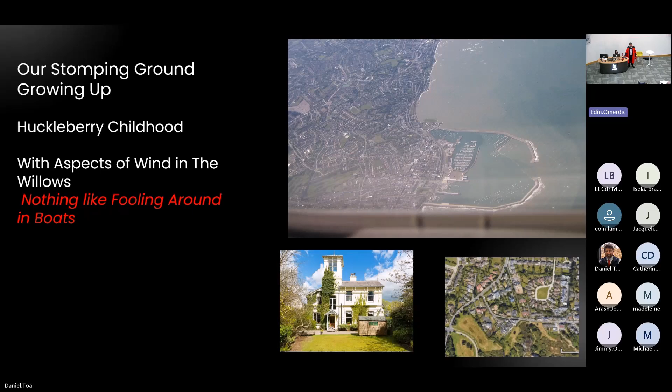Yep. I'd say this one is maybe my school. So primary school was in Oliver Plunkett in Monkstown Farm. I think that's changed over time. There were 53 in my class, and we had 2 classes in the boys. The other was 50 as well, and there were also 2 classes in the girls. So it gives you an idea of the size of schools and the size of the population. Obviously, I'm one of the baby boomers.

And then secondary, we went up the hill on the 46A bus to Stillorgan, which was an engineering and science focused school with laboratory equipment. I think that's enough on the schools. Next up. Okay.

So early spark ventures. When did I start getting interested in things electrical? So as a kid, Mars had a train set, that's the oldest brother. He may be online, but it's very, very early in Sydney.

I remember when the Bakelite plugs and sockets used to break, being the one who was interested in that sort of thing, so fixing those. I do also remember taking apart a battery and being disgusted with the sticky goo that was inside it.

But then one thing, asking Dad the questions kids always ask their parents: which would win, a lion or a tiger, or why did the Tweety birds not fall off the electric wires electrocuted? And so at that age I understood they're isolated, they're not in touch with the ground, they won't get electrocuted.

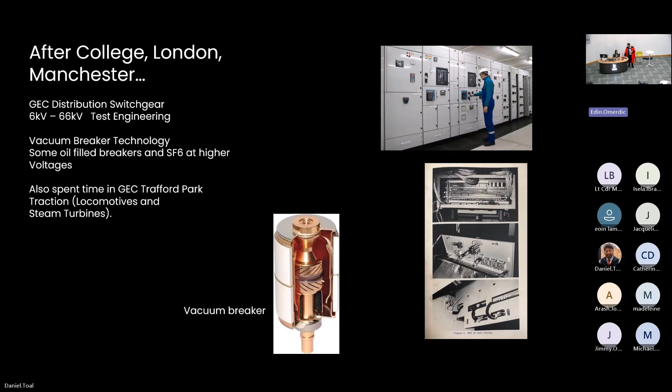So we'll go on to the next slide. Okay. Next up.

One thing I noticed: the rate of change in electrical engineering was slower than I was maybe keen on when I was a young buck, and part of the reason is electrical technology is designed to last. So the installation in the London Underground, the installation of Ardnacrusha in Ireland, these electrical plants are still in existence. They have a 100-year-plus lifespan.

So the influence that has on electrical engineering design is we don't want the service teams and the designers to be designing a new version like Microsoft Windows every year, because the service people have to service equipment for 100 years. So it means the technology is very well engineered, but the rate of change can be slow. And as a young buck, I thought, gee, I want a little bit more excitement than that, although there was the high voltage risk aspect.

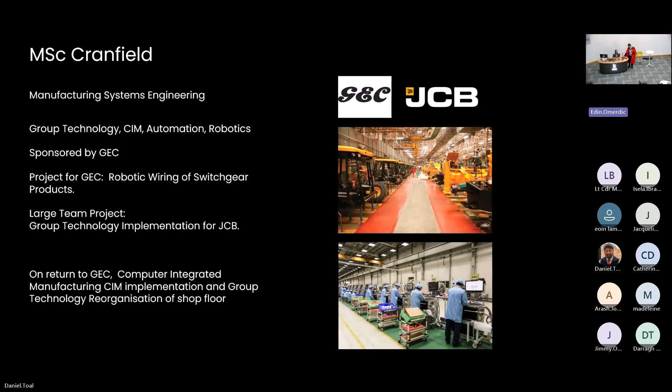Next up, better get to the research fairly soon. Sorry. Here we go.

Oh, yeah, forgot this. While in Manchester, I used to play in a small three-piece band. We called ourselves Choir Crack, which everybody in Ireland knows what that means, but most other people in most other countries wonder what's it. The new band that's into the new drug at the time from America. But no, we all know what it means. So we used to play clubs and the odd wedding and pubs and the like.

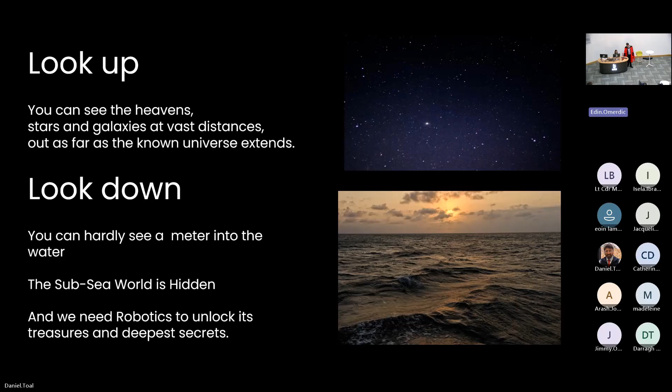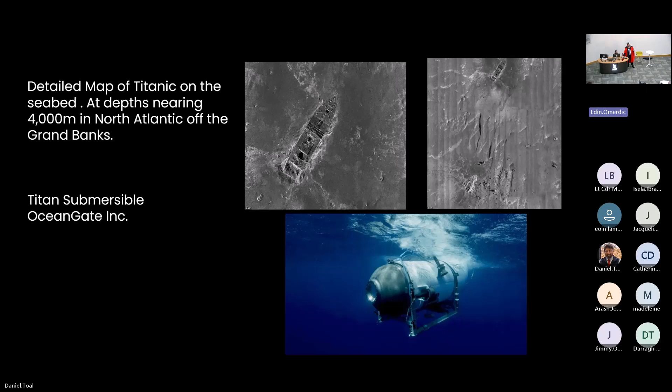Most of our robots, we don't need a big air-filled compartment for humans. We can shrink down small air enclosures for some of the electronics that we can't have in fluid, but a lot of the stuff we can actually have in fluid. So we avoid that in robotics.

So while Challenger Deep, the deepest part of the ocean, which slide am I on? The one with Hidden Ocean.

Challenger Deep, the deepest part of the ocean, is in the Pacific, not the Atlantic, but it's 11,000 meters deep. The abyssal plains are down at 6,000 meters. So while little science submersibles have gone to the bottom of even Challenger Deep, the trouble is they're so heavy with the wall structure. The scientists can get down, look through tiny portholes, see the outside environment, but they're almost immobile. They go vertically up and down.

So there's no robot or submarine that exists that could launch, say at the Shannon or West Clare, follow close to the seabed and come up in the US of A or in Canada. It just doesn't exist. So most of the ocean is actually still inaccessible. Robots can be designed to target certain zones. So we're working in this space. The oceans are unknown to us. Next up.

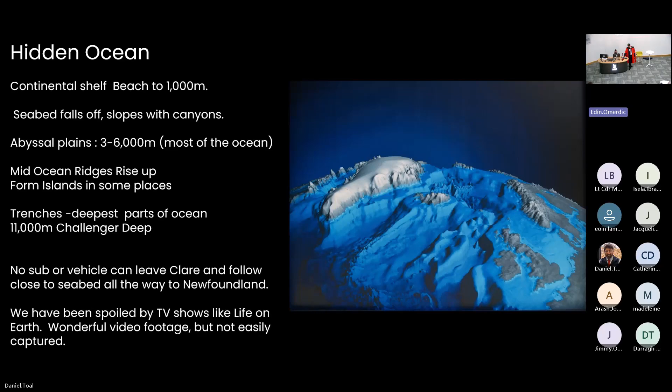So the marine challenges. When we want to start unlocking this underwater world, the space guys have to develop their robot to survive takeoff. But once they're up there, they've only a 1 atmosphere difference between inside the spaceship and outside. We have the same pressure for every 10 meters we go down. So 1 ton per fingernail when you're down at the Titanic. So pressure depth is a challenge. We've no radio communication. We can't navigate with GPS.

So there's so many challenges there. I'm not going to go through the list, but if you're quick readers you might have caught some of them. There's lots for us to do if we want to unlock that underwater world. And that's effectively what we've been focusing on in our research group, dealing with the challenges so we can get the robots operating in these zones. Next up.

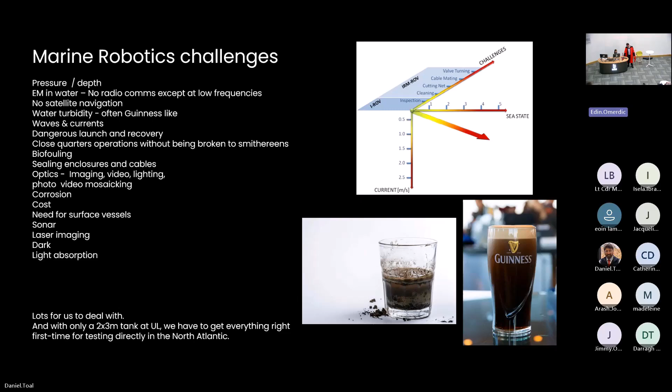Okay. So our team is currently of the order of 20, 25 people. Over time people leave and come, so I'm not going to list all the names because I'll leave somebody out. Some of our alumni are here. So this achievement isn't my achievement. It's all these people that have worked in the group, supervised by me and my colleagues. The co-directors are Gerard Dooly and Edin, who are both here, and Aoife is our coordinator. I won't go naming everybody else, because I'll leave somebody out. Next up.

Ken Harris is here, and Ken and Paddy O'Donnell used to do an awful lot of our mechanical work in the workshop to support building some of these robots. The great interaction we had with them is we could design very actively by walking up and down with them. Because we were designing one-off vehicles, we didn't go to the full extent of doing full detailed engineering drawings.

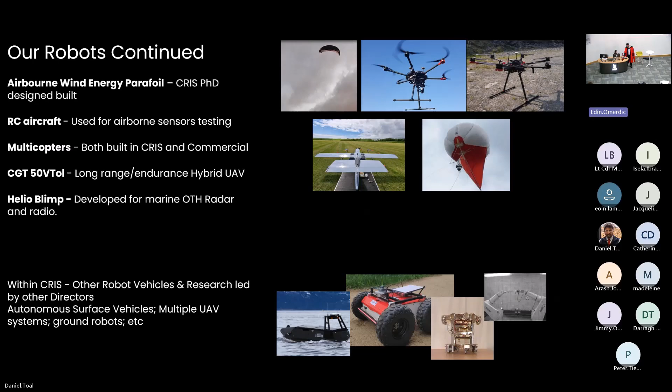So some of them are in the area of electrical engineering, developing electrical engineering technology to make the installations more robust, both electrically, so that to deal with the very harsh environment offshore, but also then the operations in the offshore environment, the humidity, the waves, the moisture, sealing against the weather, and then also integrating into the grid.

Most wind turbines are grid connectable directly, which means you can control it to give you exactly 50 hertz, so it'll match to the grid. What we're saying is, let's do what we have a patent in this. Let's interconnect all the offshore wind farms together. Let them interact together in unison, but let them be frequency wild. Let them not be compliant with grid codes, because we can remove all the power converters from the offshore installation, one of the highest failure rate components, especially in high humidity and salt environments. We bring that power conversion onshore, and we convert to grid compliant 50 hertz voltage regulated power at landfall. So that's, for example, one of the patents.

The other patents are in the sonar technology area. The next bunch is a bunch of PhDs in submarine robotics, developing vehicles, developing the control systems, developing sensors so that it can work very close to targets. If you're operating in an environment where the turbidity is Guinness-like, it means you can't see the target you're about to bump into. If there's a wave or a current pushing you, we have to deal with how do we detect objects close to, when we want to work close to them, we want to maybe intervene on the targets, but we don't want to crash into them all the time.

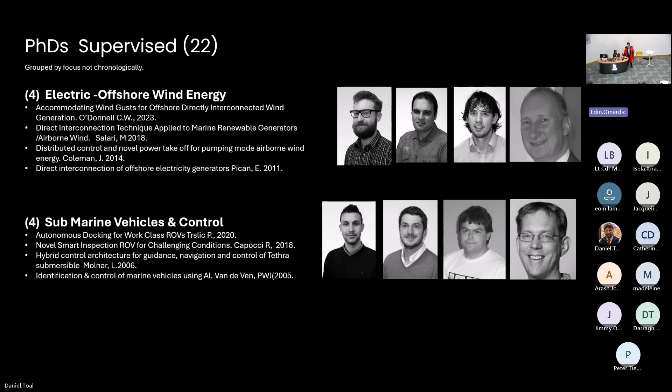So maybe next slide, there's some more PhDs in the next bunch. There's an area of sonar and sensors development. There's a best paper on the sensor. Sean Nolan is in the team here, so we've developed a sensor which got best journal paper over a 2-year period for the Journal of Marine Engineering and Technology.

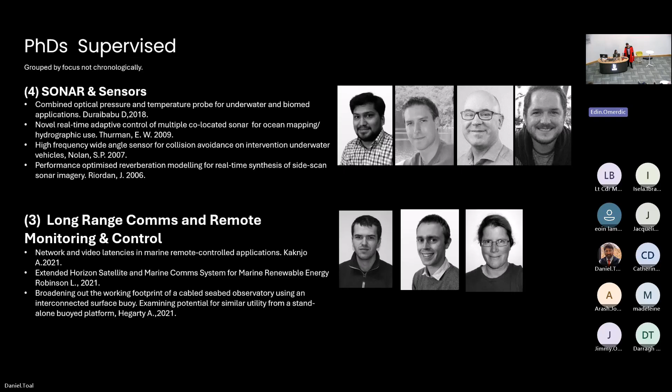Then we describe some of the offshore environment is very hazardous. So if we can remove humans from that offshore environment, let alone going down in submersibles, or even on the surface vessels, if we can bring them ashore and get radio communications to the surface and controlling the robot below. So a lot of what the research involves, how do we control things remotely using radio? So that's in the marine environment, but it's in the air too. Keep going, this is more PhDs. And then there's a few more PhDs there in airborne systems.

And look, I think enough on those. I would better gallop on.

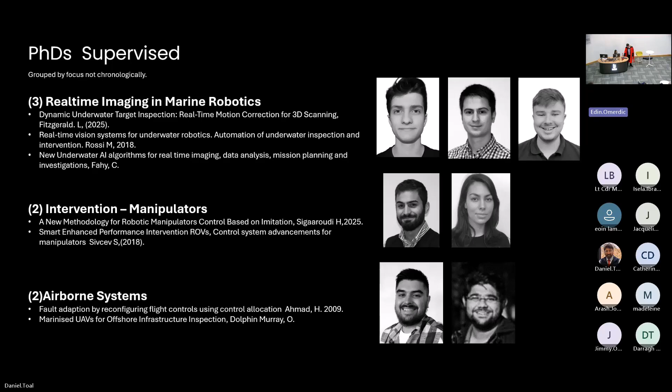So the EU have funded a project which is trying to develop the monitoring capability, and they're hoping that there'll be international agreements because most of the deep sea mining will be in the open ocean. It won't be in territorial waters. So if there's international agreements, a bit like the protection of the Antarctic, and if there's the capability to monitor what the miners are doing.

So if they eventually go mining for nodules of manganese off the seabed, or mining close to thermal vents, this project aims at developing the capability of monitoring what's going on - monitoring the plumes, the disturbance, the sound, etc. We're developing robot capability that works right beside the mining machine in the most hazardous zone, using an ROV tethered to the mining operation, sending all this information real time to the surface vessel connected to the mining machine for the ore.

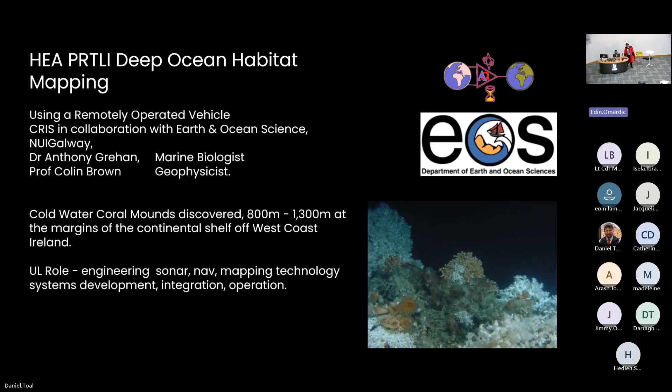If you image with a sonar on the ship, you'll get a very low resolution image where you basically see the shape of the seabed, but you won't see anything smaller than a truck. So you won't be able to identify that's potentially a coral mound. If you see a slope, you won't know if it's just a natural rock slope, or a very complicated geometry slope, such as a coral mound.

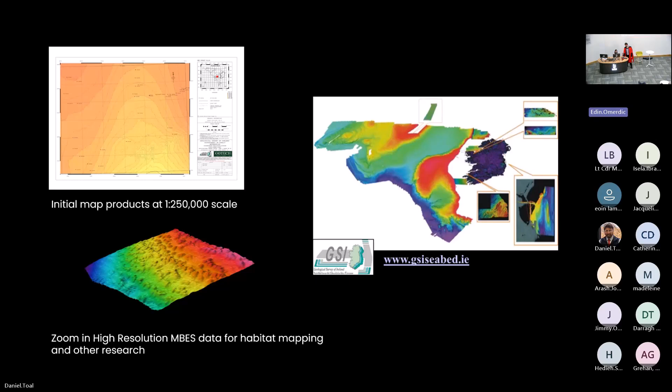So deploying ROVs, you can get a much, much higher resolution map - geometry, topography of the seabed - plus video. I think I'll have video in here... yeah, this is the automation, I've got the wrong version, I don't have the video in this one.

Anyway, we'll skip ahead. I thought there was a video of the coral mounds down there, but we've loaded the wrong presentation - sorry, it's almost the same thing, slightly different. So as a lot of this audience aren't marine engineering technologists, I'm going to give you a short tutorial on how sonar works.

Next slide, please. So there's two types of sonar typically used - one is side scan, one is multi-beam. The side scan gives you more what they call grayscale detail, so you can see a very high resolution black and white image of the seabed. The multi-beam gives you the geometry of the seabed, so you know the X, Y, Z coordinates.

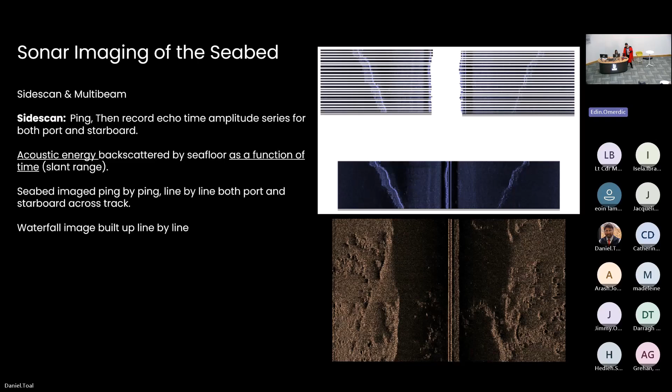Next slide. Okay, which one is this - side scan? So with the side scan, the design of the transducers lets you form a sonar beam, a bit like a torch. We have what we call the frustum, the shape of the beam coming from the torch - generally conical, and the further away you are, the bigger the area illuminated. With sonar, we can shape the sound frustum to be, rather than conical, a fan beam.

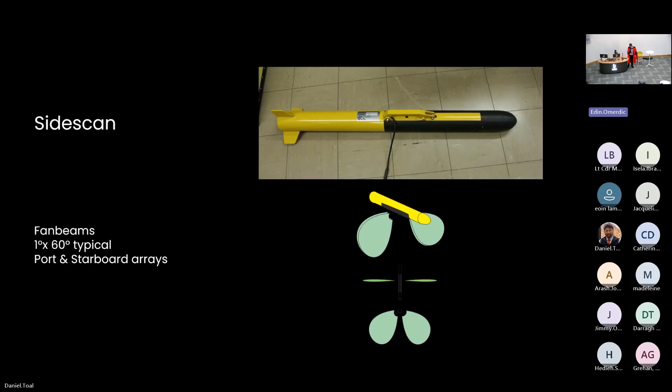So it's only 1 degree thick in one direction, and it could be up to 120 degrees wide - like a fan that's 120 degrees wide by 1 degree. We point that at the seabed, send off a ping, it goes to the seabed and echoes, so we get a narrow strip of the seabed ensonified from the vessel. As the vessel progresses, we ping again and get another narrow strip, ping again, another strip - so we build up this waterfall image of the seabed.

So this one I'll step through and show you one of the transducers sending a ping towards the seabed. This animation was made by one of the PhD students a long time ago, James Reardon. He may be online. Thanks, James, for your slide, I've been using it for a long time.

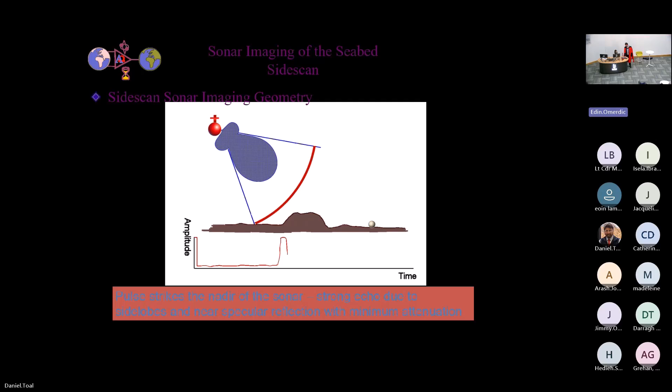So we see the sound coming down towards the seabed. As soon as it touches the seabed, the reflected energy intensity goes back up. We're plotting the energy intensity below. It starts to go back up, and whenever there's a rock or something standing up proud of the seabed, you get a stronger reflection. Behind the rock, you get a shadow where you're getting a weak reflection. So you get this graded, bright, dark representation of what you're looking at on the seabed, and it's actually human interpretable.

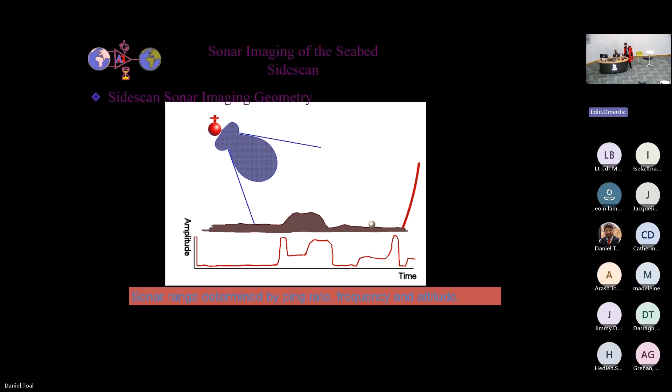So there's 9 steps in that, and then we put little narrow line after narrow line in what we call a waterfall display. We end up with what looks like a black and white image, or they make the colours gold and less gold, in order to sell their sonar images of the seabed.

We're now onto multi-beam. Multi-beam is trying to do a different thing. We're trying to measure the actual range, how long it takes to get the sonar energy to the floor and back again. If we know the velocity of sound, we can tell the range. So if we control the pointing angle and the time delay, we can map a whole lot of points on the seabed.

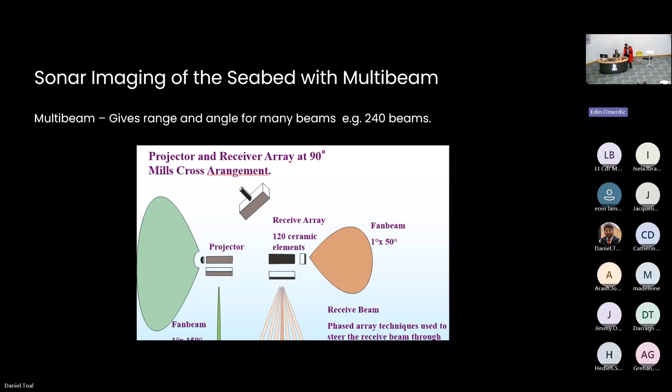So I skipped on this slide. We do that by having a projected beam, fan beam shape, but then a listening beam, which is also a fan beam. For the listening beam, we just have the same transducer, but mounted at 90 degrees. But because it's a phased array, we can steer the angle at which it's listening. So we can interrogate the projected narrow fan beam to get 120 or 240 range angle pairs across the beam.

So that's the end of the tutorial, and now we'll go back to the— are we on the next slide? Yeah, we're on the research cruise CE0505. Okay, back to survey.

So we did a survey cruise with the folks in NUI Galway, investigating the coral mounds on the edge of the Atlantic aboard the Celtic Explorer. We were the engineers, integrating the inertial navigation systems, the sonars, all the techie stuff, and the scientists were the geophysicists and marine biologists interested in the corals, the species, the size of the mound, and whether it was rock beneath the coral or coral thousands of years old, coral on top of coral on top of coral, that sort of detail. So we were the techie people helping them do that.

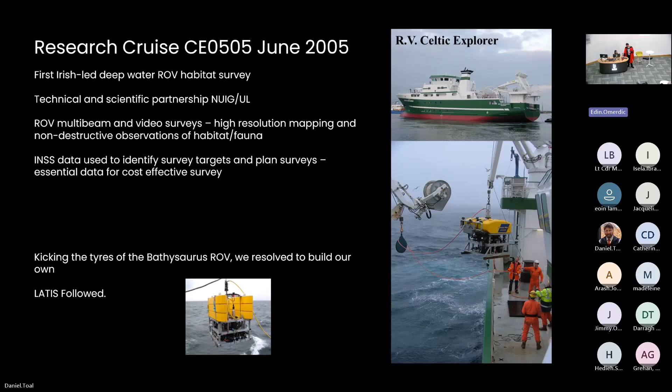Okay, so next I'll give you a quick look at the science results — the coral mounds and the different species of corals found on some of these mounds. The scientists among you might know of or be interested in the species and differences between the corals, but also the very interesting thing about corals is the range of fish and nurseries for fish species that they offer, so they're very important ecologically. And we've discovered there are coral mounds way down in the deep dark ocean, not only in the barrier reef type corals.

So this just gives you an idea. The grid there represents the gridding that's done by the Irish National Seabed Survey. So in Ireland we've mapped nearly all our seabed territory, which is 10 times our land base. You do that in the deep water with ship-mounted sonar and then grid it so that you know the shape of the seabed. So we know how far out the Porcupine Bank extends, where the slope falls off, where the Porcupine Seabight is, all the features between the Porcupine and Rockall.

So all that information is known from seabed mapping, but if you want to know the geometry and which are coral mounds or which are rocks or which are wrecks or whatever, we need to go in for a close look with higher resolution sonar. So we go in with ROVs because the long range sonars that penetrate long distance work at low frequencies and we can only grid to relatively low resolution.

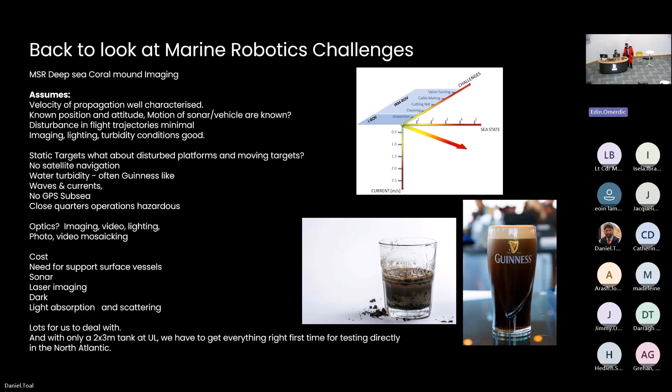Oh. Yeah. So what I've done in that tutorial is tried my best to. So for the next 3 bits, I had a little twist that I've forgotten about, so I'll do that now. I was thinking, how would I do it without being able to see the slides. So one way of doing it is I can show videos. So that's what we're going to do for the other project examples. So will we launch this one, right click or?

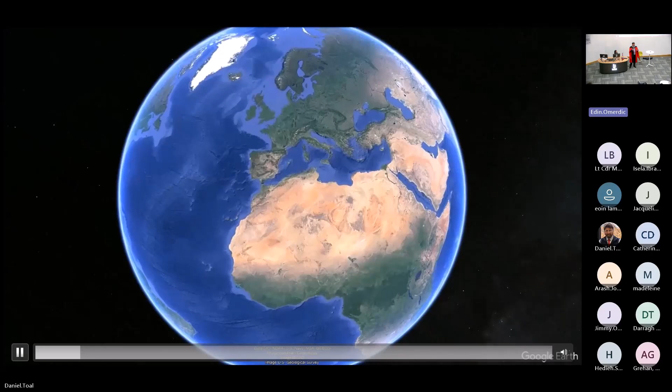Now click again. So this is a video of the robot work we're doing in supporting offshore wind. So I'll let the video do the talking and I can talk in general over it. I hope I'm not completely out of sync, but effectively when you want to put offshore wind out there, we have to do ground truth. We have to check the state of the environment before we do anything so that we can monitor whether we're adversely affecting that environment.

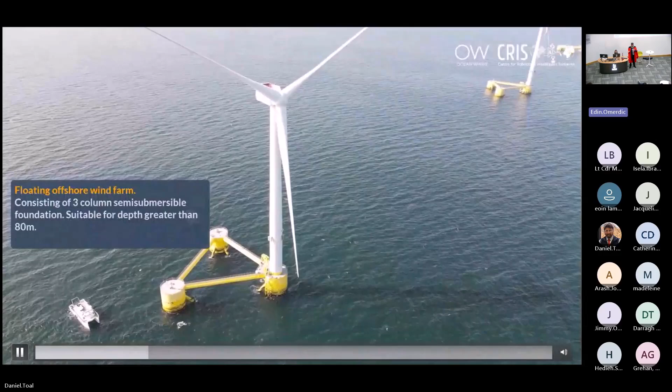We have to map the seabed, we have to find the geology, the rocks, the sand, the sediment. We have to plan the routes of cables, we have to plan the foundations, we have to get the other engineers to build their towers, the wind turbines, the nacelles, all that electrical stuff, all that mooring, and then we also need to be able to maintain and service all this equipment through its operational life and eventually re-power it when we need to replace some of the components or decommission it and take it out. So we need robots at nearly every stage in that.

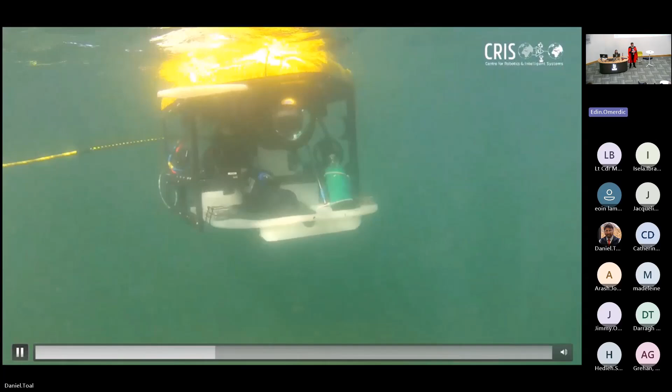So in this, is the video running? Yeah. So in this video, we're showing we're active in doing some work on a floating offshore wind farm in Portugal. We've done underwater imaging of the floats.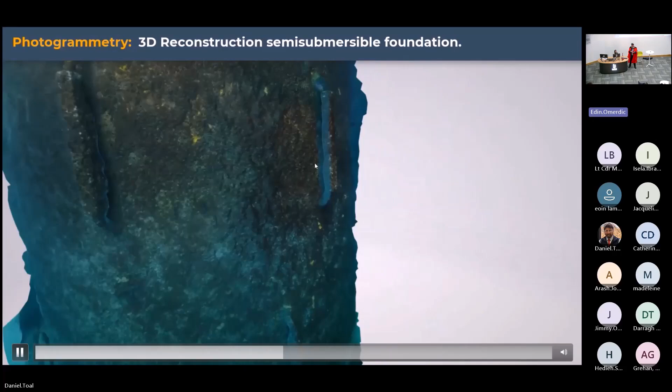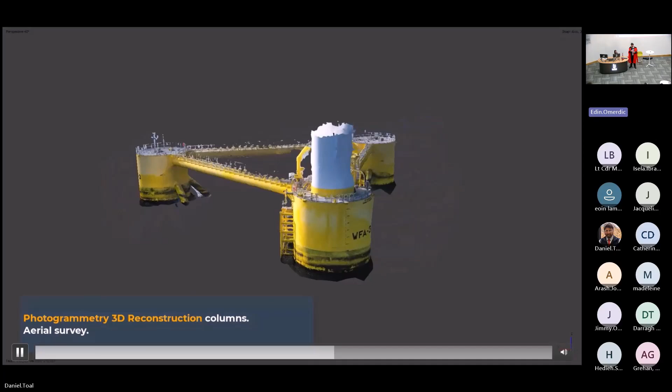So part of the engineering work you'd want to do is monitor your flexible risers, your mooring chains, your floats for corrosion, for growths, so you might have to clean them underwater to take the algae and the growth off so that you can inspect for rust. We put protective anodes on the structure so that the anodes dissolve in the ocean rather than steel dissolving in the ocean. So there's a lot of work that needs regular inspection and maintenance.

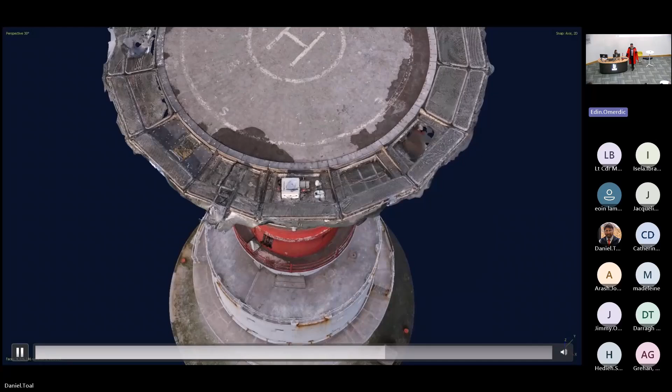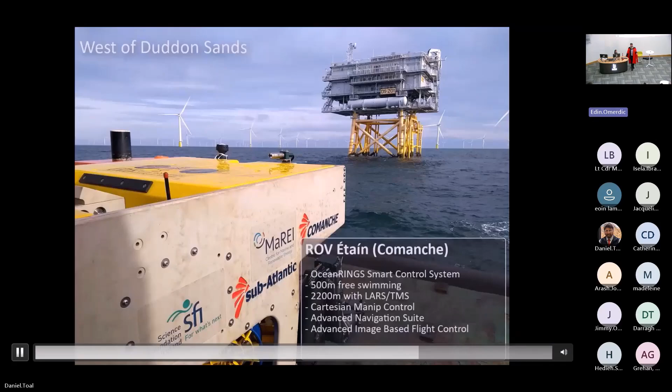And we want to do as much of that as possible, or all of that, with robots in the water, not divers. So a bit like the oil and gas industry, once they went into deeper waters, they took all the divers that they used to use in the early stages of oil and gas out of the water and they replaced them with robots. The offshore oil and gas is in deep waters where it's generally dark but quiescent. You don't have breaking waves, you don't have very strong currents. You have currents but not very strong.

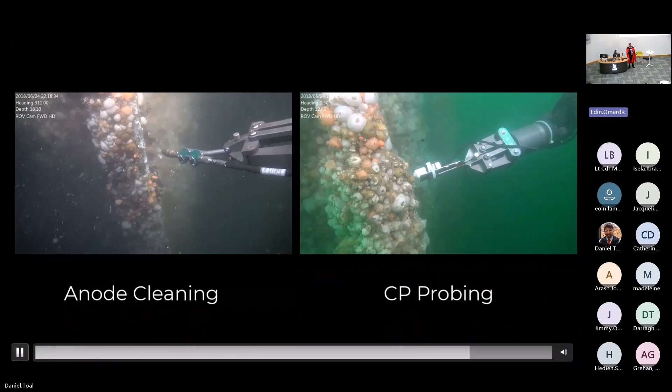In offshore wind, we're going in zones with high winds. We wouldn't put them there in the first place otherwise. High winds is high waves. So a combination of currents, winds, waves, it's a very challenging place to operate with the robot. So effectively that's where we're up to.

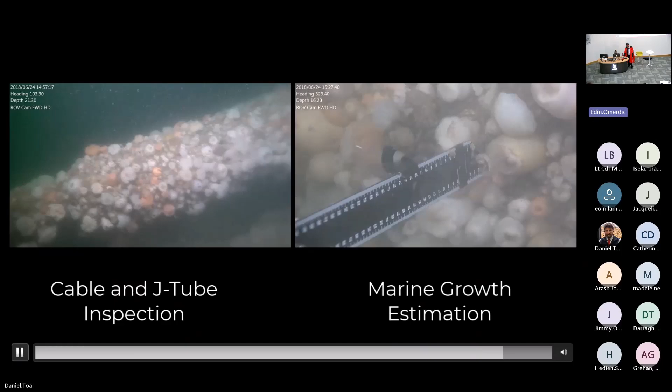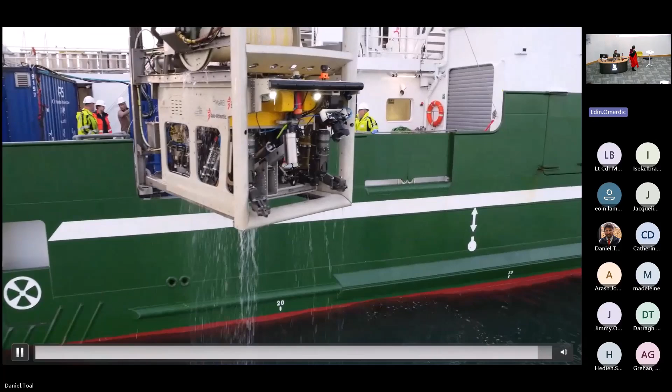So that's more or less, I think we've come to the end of that video. It's still going. Do you want to go to the end? Yeah. It's nearly done. So when I had better vision, I'd talk to the video as I could see it, but it's done now. Oh, we're finished, so we can go to the next. So the next area we're going to show that we've been working on is, which one is this? I'll play it now.

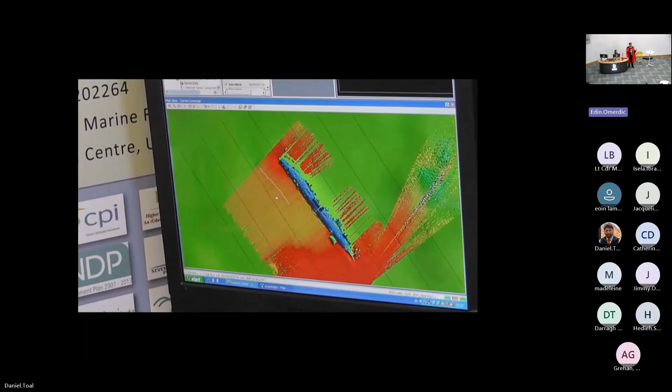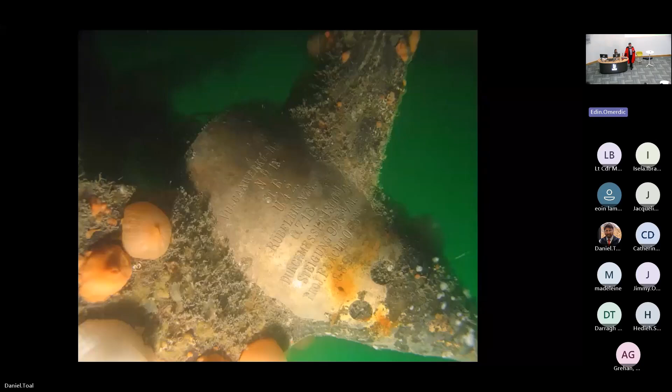The northern approaches during both World Wars, the U-boats used to sit in ambush waiting for the transport vessels, so there's a huge tonnage of shipwrecks going around Donegal trying to get into Glasgow and Liverpool, and then off the south coast trying to get into the Irish Sea. So we did a survey. One of the surveys included UC-42, which is a U-boat just off Roche's Point. They discovered there was this bump in the bathymetry close to 150 metres from the Kinsale gas pipeline. On closer investigation, that turned out to be a U-boat.

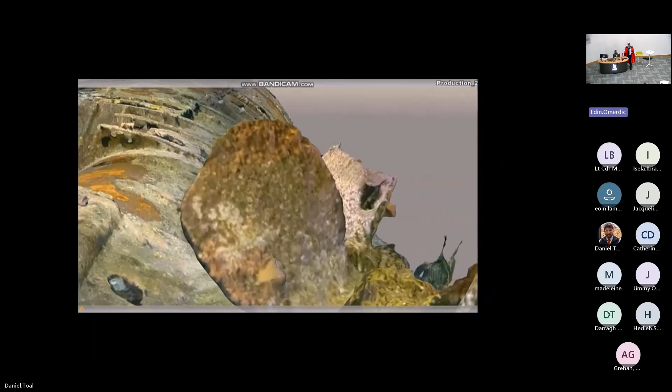And when we did the survey off the ILV Granuaile with our robots, it turned out there's still TNT mines on that submersible. So a lot of the imagery up there shows the video from the actual mission, some of the sonar image, generating the sonar in real time, generating a sonar model showing the shape of the submarine, and then the other vessels. There's an image of the mapping of the Empress of Britain, 1 metre shorter than the Titanic. It was sunk 50 miles off Bloody Foreland, again during the Second War. And there's other wrecks up around Donegal on there.

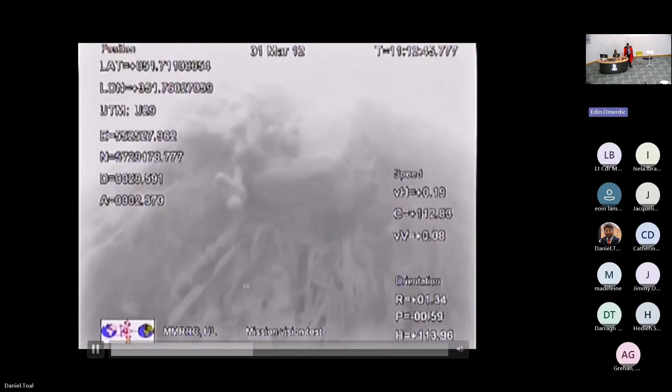So if the wrecks are more recent, there might be a salvage component to it. If it's very soon after a disaster, you may have some amount of recovery involved. But again, you need robotics to access this type of capability.

Next up, I think our last example. It's still going. Do you want to keep? Oh, it's still going, is it?

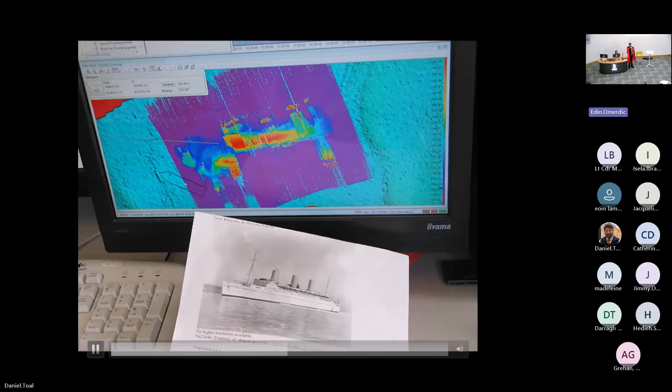Okay. So sometimes the video you see on the seabed, because of the high turbidity and the fact the further down you go in the ocean, the less colour you get, because the colourful wavelengths get absorbed in the shallower waters. Any of you who are into scuba diving will know the deeper you go, the less colourful it gets. And anybody into technical diving, as Gerard Dooly, our co-director, does technical diving down to 150 metres, you get to the point where there's not much colour, but there's lots of shipwrecks. So in fact, there's a lot of enthusiasts who go after shipwrecks.

Still going. Oh, maybe we'll... Will we continue? Yeah, I'd say. Okay. 1 second.

Now the last video. The last video then is very prevalent in the news recently: the threat to our submarine assets, cables, pipelines, etc. If the gas pipeline interconnections between Ireland and Scotland were disrupted, 38% of our electricity is generated by gas. We don't have a lot of gas storage, so if those gas feeds were interrupted, we'd have electric power shut down within a couple of days.

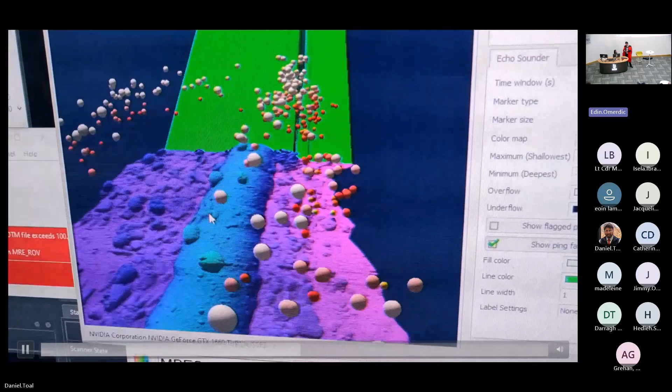So there's obviously very high risks with the power interconnectors to Britain and the new power interconnector they're putting out to France, and protecting the cables going out to the offshore wind farms as they're put out. And then the fibre optic cables, the data cables, the same issue. So we have the survey capability to monitor, map, check that there's nothing untoward happening on the submarine cable.

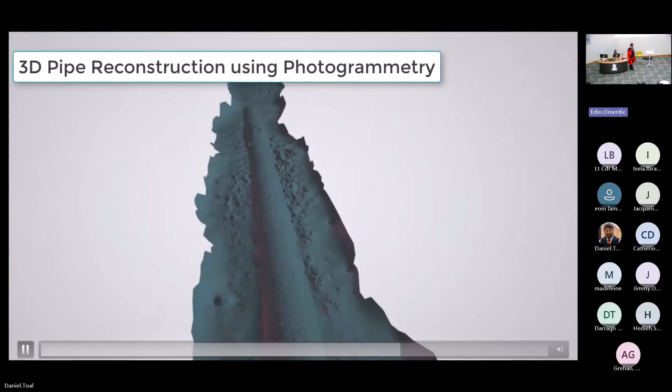So in fact, this video shows some of our work down on the Kinsale gas pipeline. Kinsale is now past end of life. They've capped the well, where they took away the Christmas tree, and there's just the capped-off pipe coming up. We were checking for leaks or small bubbles. We passed by it, but what looks like a photograph is our ROV sitting over the pipe to check are there bubbles coming up, and there were bubbles coming up, but at once every 10 minutes, a very, very low seepage rate.

But it looks like a photograph because it's not moving, and that's because our control system is so good. The control system is able to hold our robot absolutely still in the ocean. And then also included in that video was high resolution imaging of pipelines and the mattresses. So in engineering, we can check the structure, we can check if there's any mechanical risks that need servicing, or are there any threats, etc.

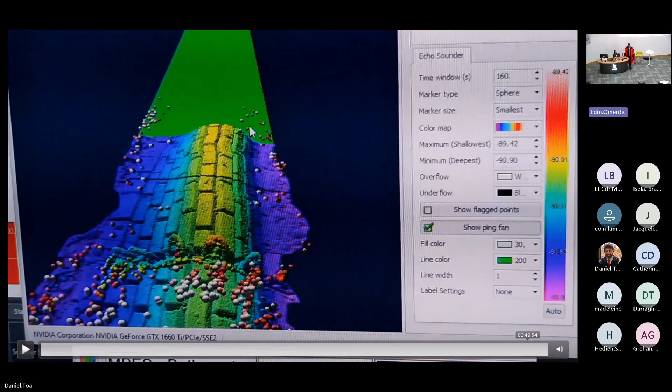So have we come to the end of that one? Come to the end, yeah. I'll go to the next. Oh, it's playing again. Let me go to the next. And then we're on to the last one. Oh, sorry, you want to go back to a different video? I think it's the same video twice. Oh, is it? Okay, sorry.

So we'll go on to the development lab and operation. Okay, so we've had many projects. We've had a large amount of funding from European projects, and from Science Foundation, Marine Institute, SEAI and other agencies. Our test facilities include a 2 by 3 metre tank. So one thing we have to do is get everything right first time when we build the robot systems to go offshore, because the cost of a surface vessel such as the Celtic Explorer is 18,000 per day. So we don't want to get on an 18,000 per day ship and find we've forgotten a fuse, because we're wasting 18 grand while we wait for somebody to bring out the fuse.

So a huge effort we do is getting all our engineering and development work working first time through simulation, integration, building, testing as best we can in a 2 by 3 metre tank. And to some extent, that's a testament to the very hard work of the team. But what we're interested in is now trying to convince the government agencies and UL to support us in this too. There's a need for this capability. We're the only research lab in Ireland that's active in this field, robotics.

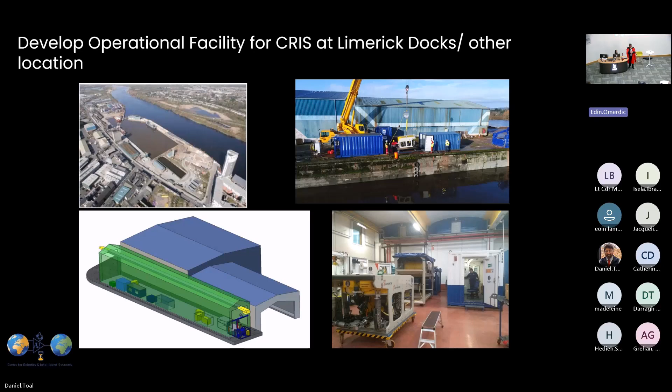What I haven't covered in any detail really is all the airborne side of what we do, which there's as much and more again. But we're interested in convincing people Ireland needs the capability. I think it's on the next slide actually. It needs the capability to go for a national lab in this area. So we're pitching and trying to convince people that while we've had great success, I'll be retiring soon.

That's one thing I never said. Inaugural lecture, I actually became professor back in 2018. So I ducked under the wire for a number of years, and they didn't know that they let me away without doing one. So I'm doing one unusually in less than a year before I retire. But so be it. It's as good now as any other time. So I think that's where we are.

Do we go to questions? Yeah, so any questions? And what I meant to do was sit down here, pretend I was Dave Allen, and drink a whiskey.

I've seen a lot of Dan's presentations over the years, and he has some fantastic videos. I think you've only seen a fraction of what he actually has recorded under the oceans over the years. So does anyone have any questions?